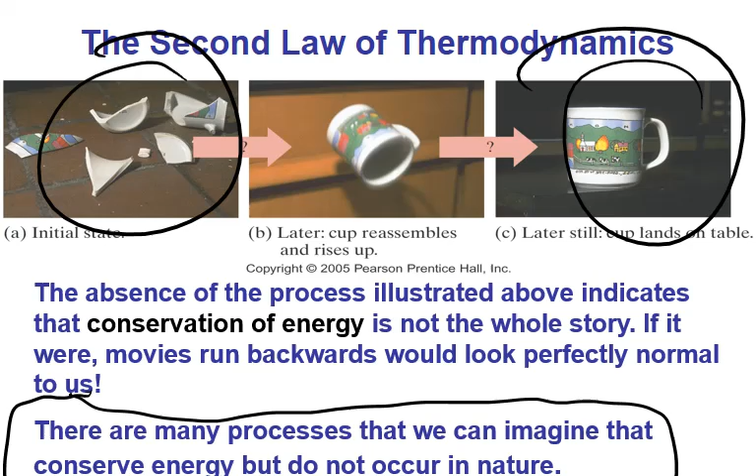I could take this from the ground, right, and then throw it into the air, give it some kinetic energy that turns into potential, lands on top of the table, but we just never see that. And so this falls underneath the conservation of energy. And so the second law describes a lot of processes that don't happen.

Another one is that heat can flow spontaneously from a hot object to a cold object. It will not flow spontaneously from cold to hot. So in other words, if you have two objects, one that's colder, one that's hotter, let's say this is the hot object. Let's say this is the colder object. What's never going to happen is this object gets even hotter and this gets even colder, right?

Because these molecules in here are bouncing around, bouncing around. It's going to smash into these, and then these are going to start to move faster, right? So you're never going to have the reverse. And so that's an important part of the second law as well.

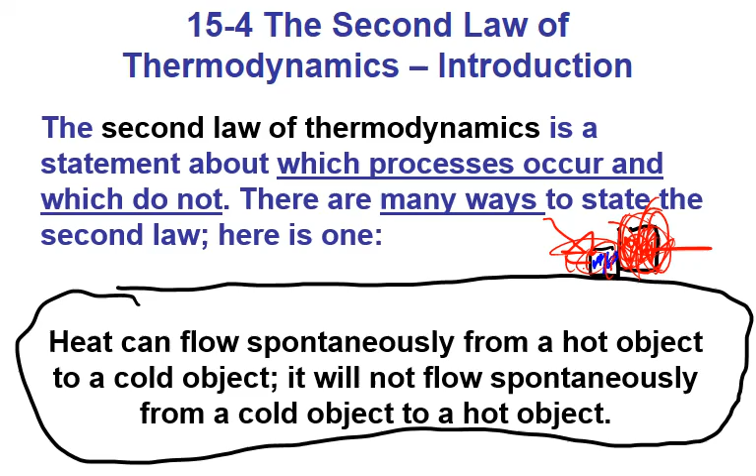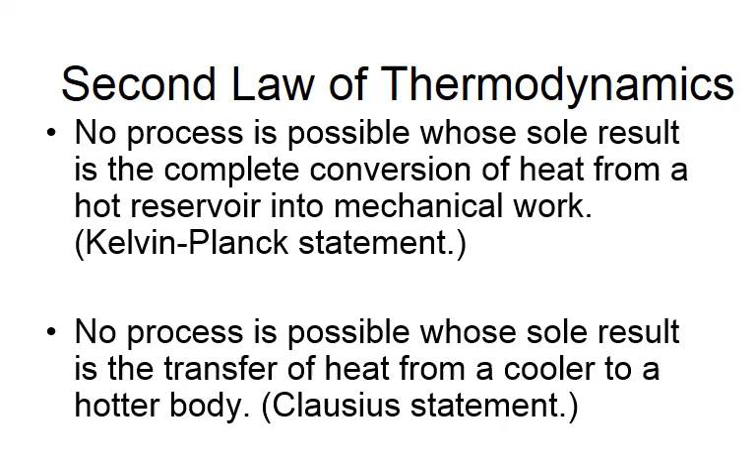So this is the Kelvin-Planck statement. No process is possible whose sole result is the complete conversion of heat from a hot reservoir into mechanical work. So you're never going to have a 100% efficient engine, and we'll talk about why that is. And then no process is possible where the sole result is the transfer of heat from a cooler object to a hotter object. That's the Clausius statement. So both of these fall under the second law.

If we look at that piston from the original picture that we had, we have that hot gas inside here that's expanding and pushing that piston over, right? And as it pushes that piston over, that gas is going to naturally cool down. And as that happens, the gas is expanding, and these molecules are going all over the place. They're not necessarily all lined up, right? And therefore, there's some kind of chaos in there, but we're harnessing some of that, right?

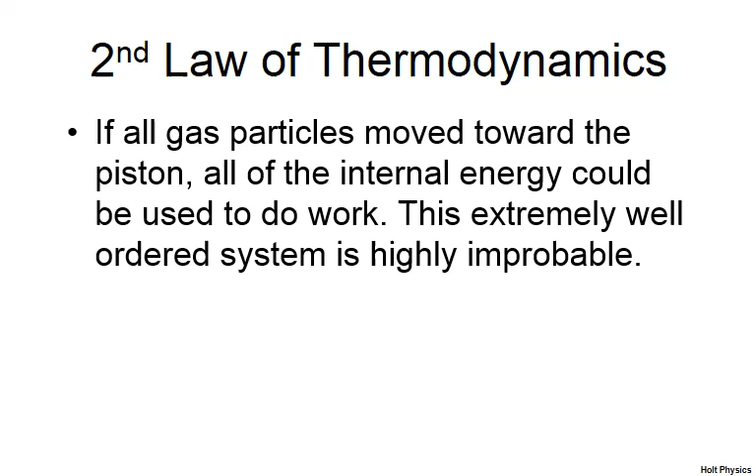Now, let's say we got all those molecules to line up and we're pushing this piston over perfectly, right? And those molecules are perfectly pushing the piston over. And as they do that, they're exerting all their energy. If it could do that, the final temperature would be 0 Kelvin because it exerted all of their energy, right? And we know that's impossible.

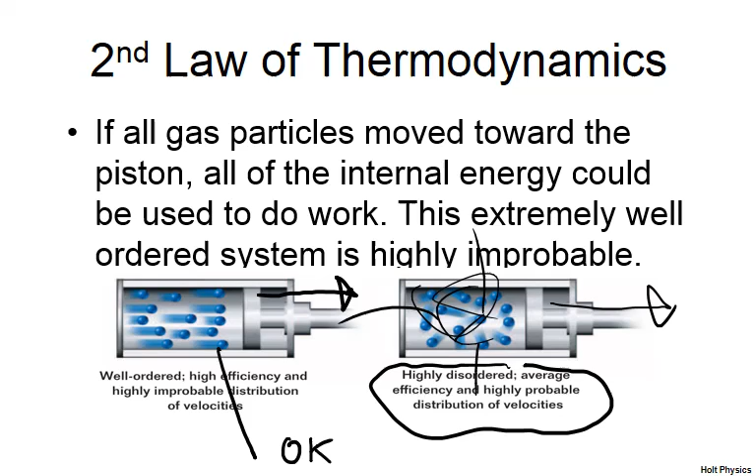Really what's happening is it's pretty disordered. All these molecules are going all over the place. Some of them are pushing that piston over, but some are smashing into the wall here, the wall here, the wall here, and into each other. So it's more chaotic. And so that's why you're never going to have a 100% efficient engine where all those molecules are lining up.

So a good example of an engine where we can evaluate this is where we have water, we have a boiler, and we're heating this water up, it's turning into steam. That steam comes through here. It's pushing a piston over. It's like that locomotive simulation I showed you guys on that first day, pushing the piston back and forth, back and forth. Or it could be like a pinwheel here.

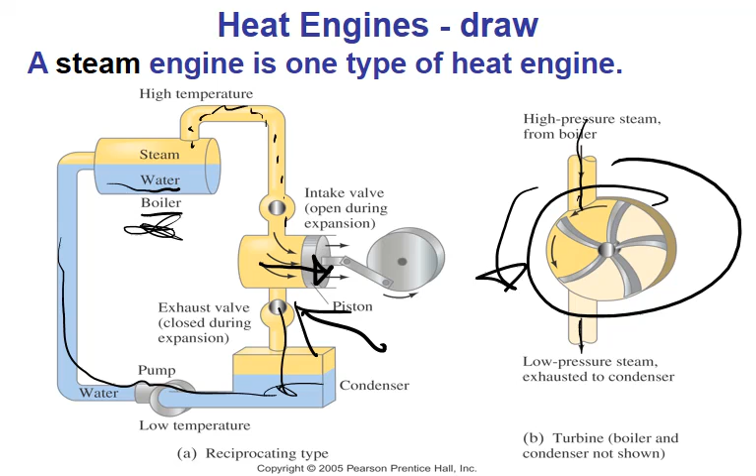The hot steam comes in, pushes this around, cools down, and then goes to the condenser, turns back into water, and then we can take that back up, and that boiler can heat it up again. We have that process continuing. And so we're never going to have 100% efficiency with that. You wouldn't want to put your hand here right after that piston's pushed over. It's still going to be pretty warm because it didn't exert all of its energy. It didn't use it all to do practical work.

All right, so this steam engine receives 4,400 joules of heat per cycle and does 1,600 joules of work. What is the efficiency of this engine? So if you want to even just try to figure this out logically here, see if you can figure out the efficiency of this engine without me giving you any kind of equation or anything. See if you can think through that. Go ahead and pause the clip and try this, and then when you're ready to check, you can hit play to

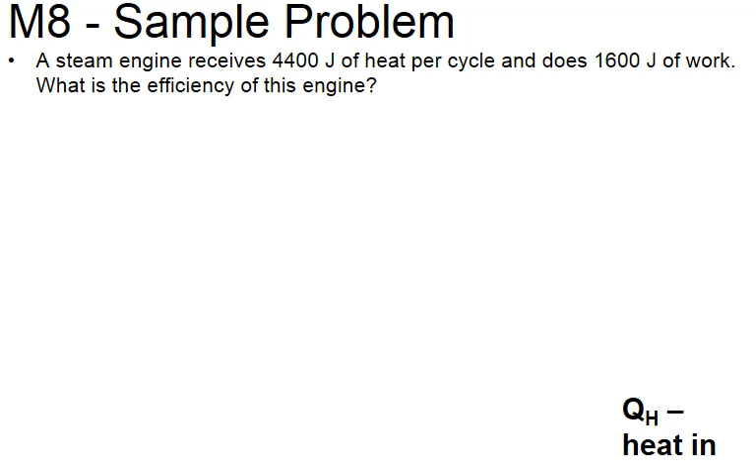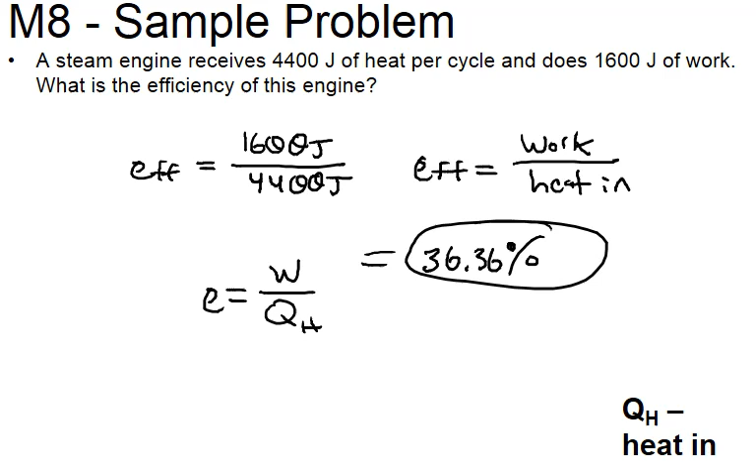continue. All right, so efficiency is work over heat in. So, 1,600 joules of work, heat coming in 4,400 joules, so only 36.36%. And so that would actually be pretty decent for a steam engine if it got that much out of it. Steam engines are pretty inefficient.

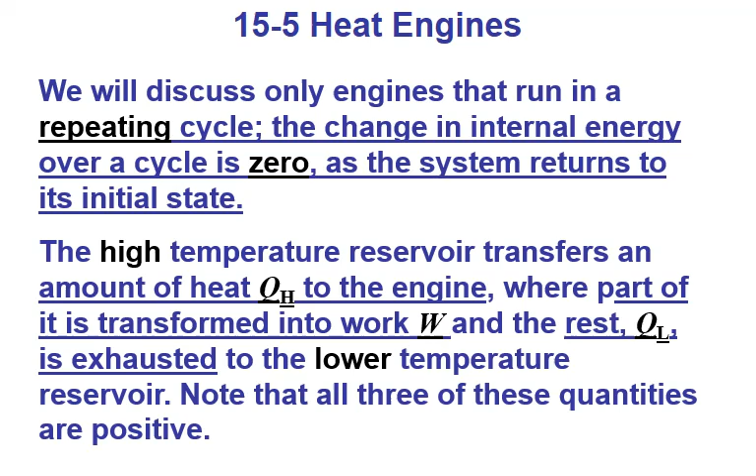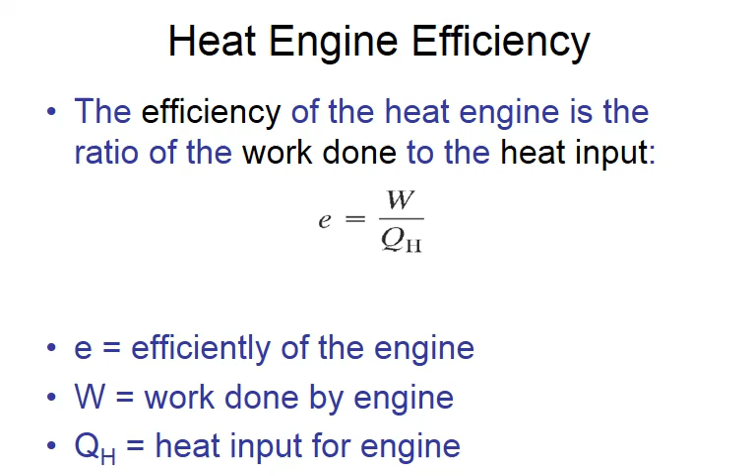So, we're going to be talking about repeating cycles with engines coming back to the initial state. The heat coming in, QH, is what we're dealing with there, how much work, W, and then the rest is exhausted, QL there, to the low temperature reservoir. The high temperature reservoir is where we're dealing with QH. And so when we're dealing with engine efficiency, we're dealing with how much work you are getting based on how much QH is coming in. And so you could even just think through this logically like we just did there.

Now, if we consider an engine, how much work is being done, we can look at QH. That's the heat coming into the engine, and then we subtract QL. That's the exhaust, and then we can figure out how much work we get. So if we replace W with QH minus QL, we've got that. And so this is another way that we can calculate it, 1 minus QL over QH. And the smaller the QL is, the less that's lost, the higher the efficiency will be. And then if none is lost, then this is 0, you'd have a 100% efficient engine.

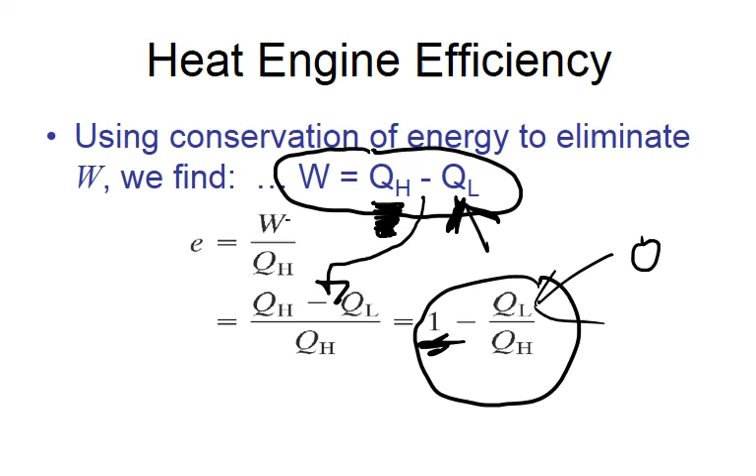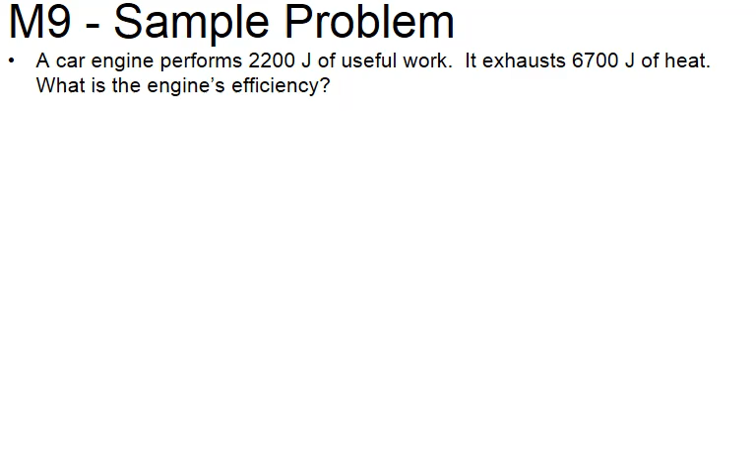And so if we have a car engine that's performing 2,200 joules of work, we'll say, and it's exhausting 6,700 joules of heat, we want to find the engine efficiency. So go ahead and pause the clip, give this a try, and then when you're ready to check, you can hit play to continue.

All right, so in this case here, QH minus QL. QH coming into the engine would be 8,900. QL that's lost is 6,700. So this would be a 24.7% efficient cycle.

Now, Carnot investigated how to convert heat into useful mechanical work. And we know that we can't have a 100% efficient engine. But is there actually a limit to how efficient an engine can be? And so that's what we can evaluate now. We talk about the Carnot engine as essentially the ideal engine, the heat being transferred in an ideal situation, and it's reversible, and we're assuming no friction.

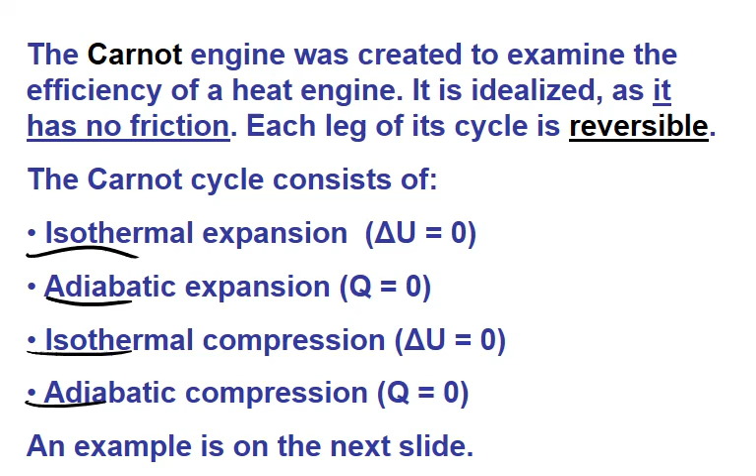So this would be the perfect cycle: isothermal expansion followed by adiabatic expansion, isothermal compression, adiabatic compression. And let's take a look at an example of that here. So if we have isothermal expansion, then adiabatic expansion, isothermal compression, adiabatic compression, this would be the heat in here. This would be the heat going out, QH, QL, and then the practical work that's being done would be that area inside there.

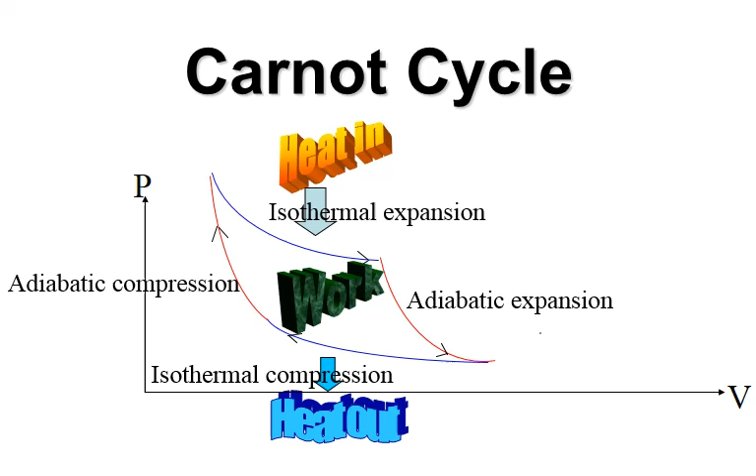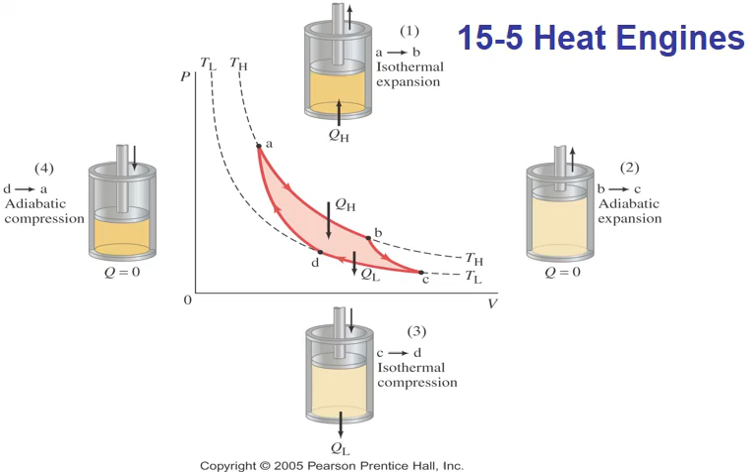So for an ideal reversible engine, we can write this in terms of temperature, where we have TL as the exhaust temperature, the low temperature, and then the high temperature is TH. And we must have this in Kelvin. Because if you think about it, if you had this in Celsius, that could screw everything up, because if, let's say, TL is 0 Celsius, then you'd have a 100% efficient engine.

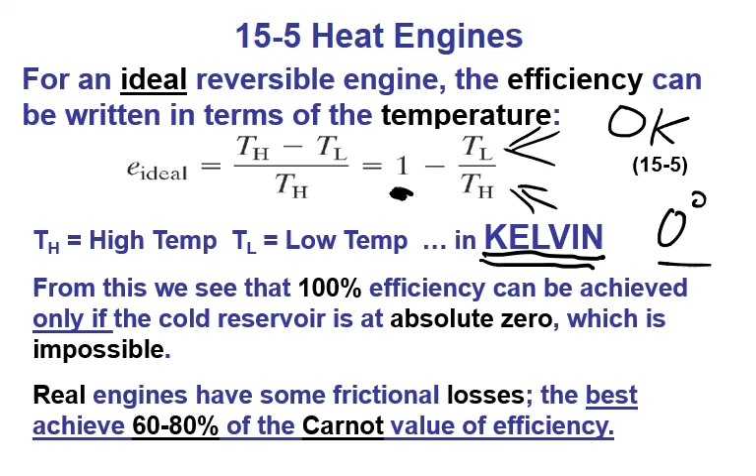0 degrees Celsius, though, that's more manageable. Then you could say, oh, I have a 100% efficient engine, right? But that's really not true. So again, we can only have 100% efficiency if our cold reservoir ends up coming to be absolute 0. And real engines have some frictional loss. The best can achieve 60 to 80% of the Carnot efficiency.

So here in M10, if an engine is 38% efficient, what's the exhaust temperature if the temperature of combustion is 623 Kelvin? So let's consider that here. We have our combustion is 623, 38% efficient. Why don't you go ahead and try this one. Go ahead and pause the clip and see if you can determine the exhaust temperature if we have these values here.

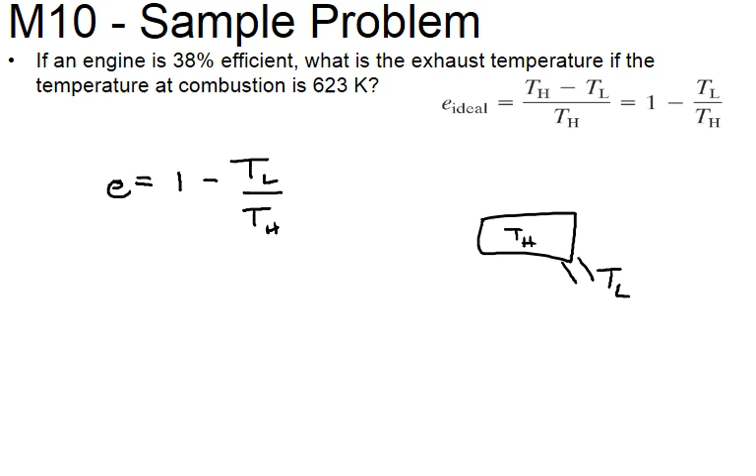All right. So you should have gotten, being careful with the algebra, cross multiplying, then dividing, 386.26 as TL. So we start with an engine temperature 623. That's TH, and then the exhaust is 386. That's TL. The more these values differ, the more efficient it is, right? Because the smaller this TL is, the more efficient the engine is. In this case, it was only 38% efficient.

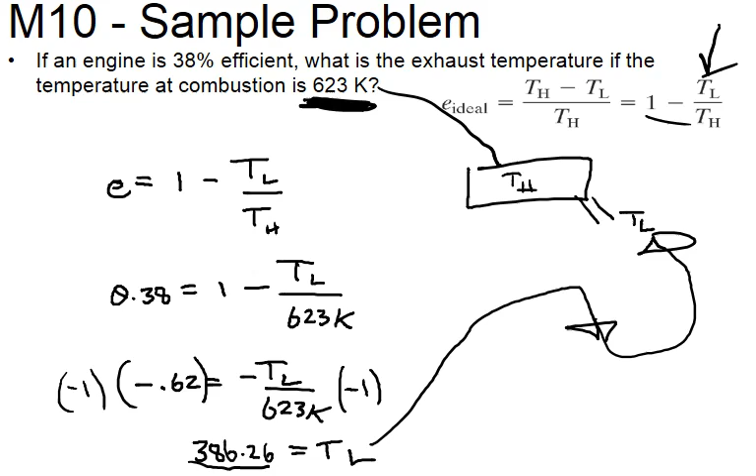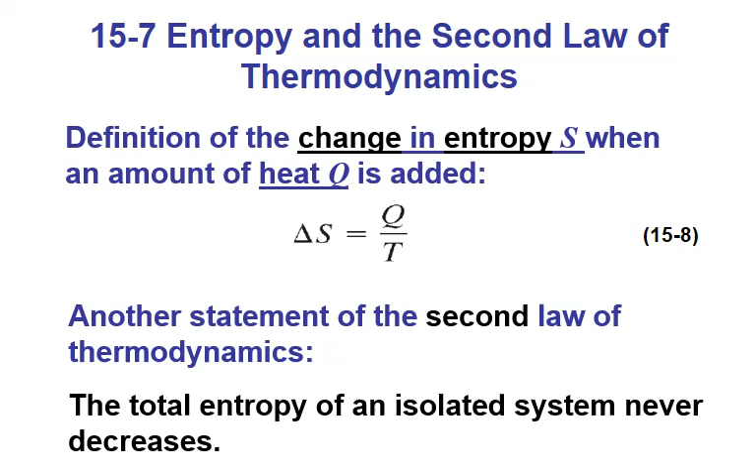So the definition of a change in entropy, when a certain amount of heat is added, is delta S equals Q over T. And so the total entropy of an isolated system never decreases; it always increases. So let's take a look at some situations here. Let's go ahead and define these. The change in entropy is a joule per Kelvin. Q is heat going into the system, and T is Kelvin temperature, the average temperature for the process, and the key here is average temperature.

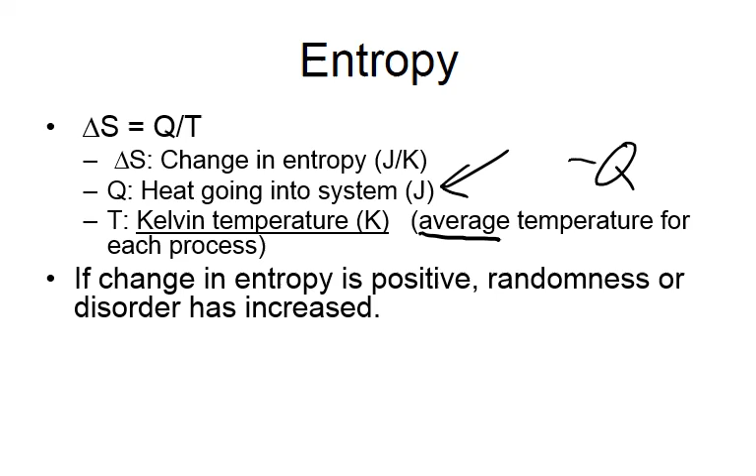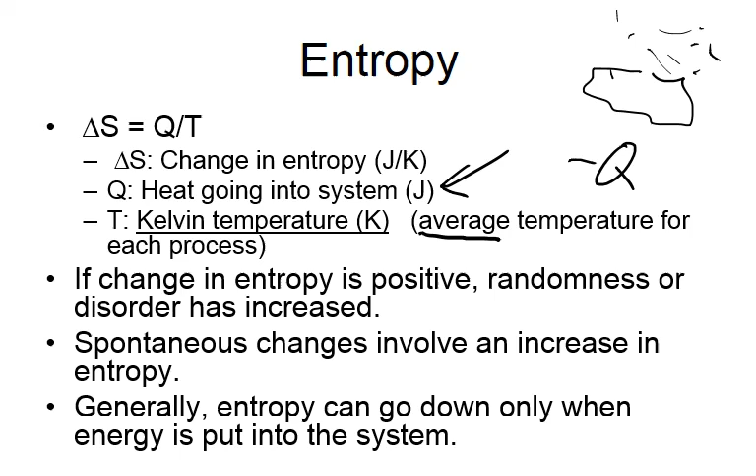The heat going into the system, let's say you're cooling the system, then you'd have negative Q in there. And if the change in entropy is positive, then randomness or disorder has increased. So if you have liquid water and you're heating it up and it's turning into gas, it's going to be disordered. Spontaneous changes involve an increase in entropy, so natural processes go toward more disorder. And entropy can only go down when energy is put into the system. If you're decreasing entropy in one area, you're increasing it in the other, and the overall process is an increase in entropy.

All right, so this is M13. What is the change in entropy of 0.29 kilograms of water at 5 degrees when heated to 100 degrees? And then part B, how much more entropy change for the continued warming until all the water becomes steam? It's going from 5 degrees to 100 degrees. Again, you're going to need to have temperature in Kelvin. You can do the first part with MC delta T, and I want you to see if you can go through the whole thing. So go ahead and pause the clip and give this a shot, and then you can check in a second.

Okay, so we should get for the heat going in, going from 5 degrees to 100 degrees, 4186 is the specific heat, so that's Q going in. And then for the entropy change, we know how much heat went in. The average temperature is 100 plus 5 over 2. We add that to 273, and that gives us the average temperature in Kelvin. So the overall entropy increase would be 354.299 joules per Kelvin.

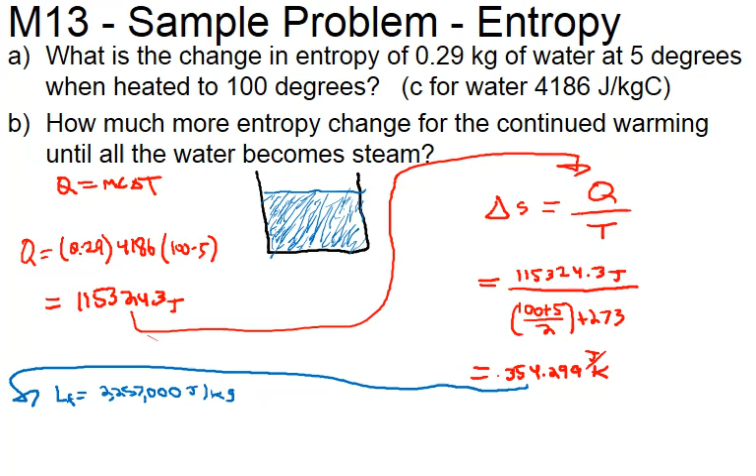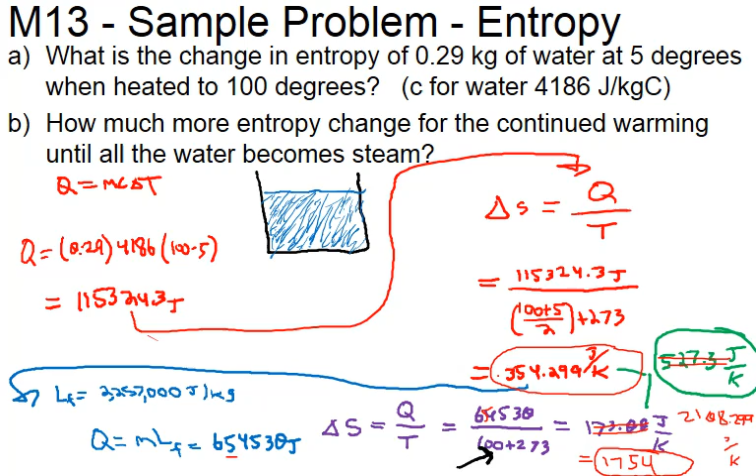How much more entropy change if we continue to bring this all the way to steam? So the latent heat we've got here is the amount of heat it would take for water to become steam. And we know that temperature is going to stay at 373, 100 degrees plus 273. So, 1754 for a total of 2108 joules per Kelvin.